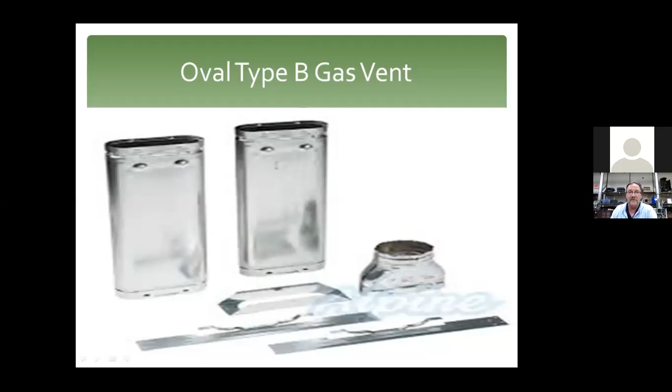Manufacturer's instructions are on the B-vent itself, everything's printed right on it. But once you get up through the wall and into the attic, you can actually go back to round and out into the flashing, because they don't make an oval flashing.

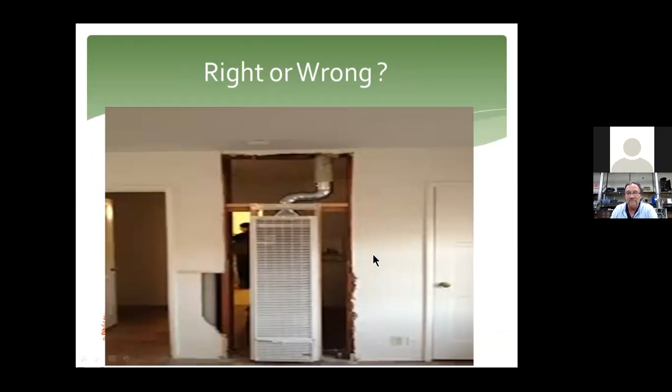This is some of the stuff we come up with out there. They tried to take the mobile home furnace and install it—well, actually this is the wall furnace. They took a piece and converted it back to round.

So, you know, this is some of the stuff that's wrong out there. Here's some other stuff we're always looking at. I need to move this thing, it keeps popping up. Hang on a second. All right.

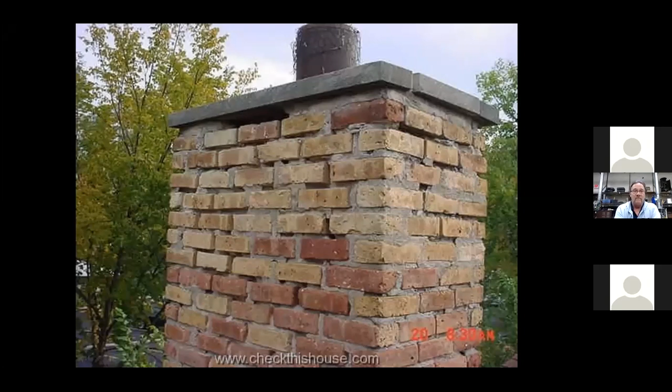Now, again, with the mortar missing, this is not because of the weather on the outside of the house—this is the weather that's on the inside. And the main reason is they put a cap on it, and put a piece of single wall pipe up here. This pipe does not line the chimney all the way down, it just stops right there. So all the flue gases inside are trying to go up that little pipe, and they're condensing. Flue gas, when it condenses back to moisture, is a little bit acidic, so it's eating the mortar joints away. That's exactly why your chimneys are falling.

This is a common thing right around here in Athens, and actually anywhere you go. I could drive down to Cole's hometown, Marietta, start walking down the street and find probably 20 different things wrong right off the bat.

Plugged flue. This is one of the reasons we require people to take draft tests, to make sure there's no spillage. A lot of the inspectors out there, when they do their initial inspection, they're not going to pull that vent connector off to check that. That's why we want you to take a draft test. If you have any inclinations, have the contractor or heating technician pull it off there and check it.

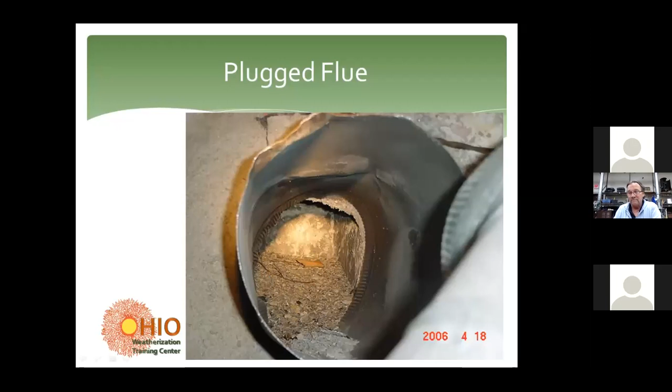90%. This is the mortar and stuff that was coming out of here, now laying down here. Again, this is a tile line chimney, but the unit attached to this chimney, this tile liner was not sized for whatever's attached to it, or there would not be any moisture. So basically, by the time the flue gases try to get to the top, they're condensing back into moisture and running right back down.

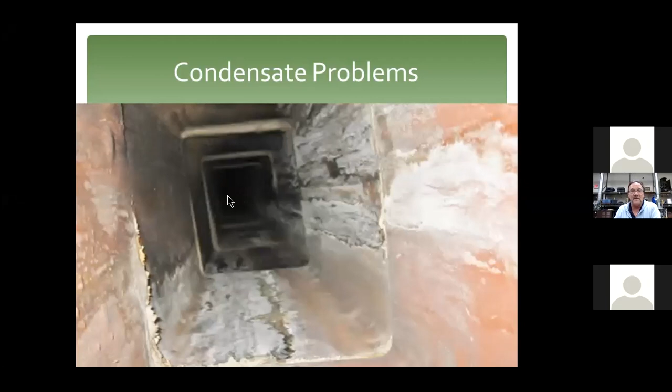Then you got critter problems. If Dave was here, he'd be getting his gun out right now. Get the live trap out, I mean. This is bad when you start having things looking back at you.

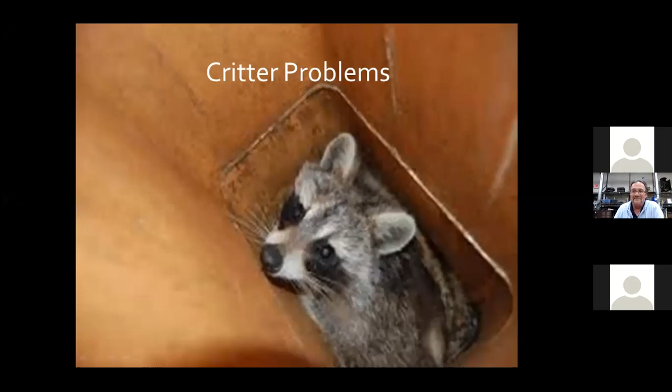Now, explain to me what I got here. Got a furnace connector, vent connector. Dryer vented into a chimney. I got a dryer vented in. Well, at least it's the lower BTU. Half right. And you know what? Billy Bob's got a good idea. You see what this thing says? Drain. He found out there was a problem with moisture in the chimney, so why not put something in there and drain it away?

Got a question here from her. She wants to know if you could explain the difference between a factory line chimney and a regular chimney. Yeah, we got that coming up. I got some examples of liners for the oil and the... Yeah, it's coming up. Good question though.

Now, unfortunately, after 40 years of this, you'd think you'd never run into anything new. Yeah, believe me, if you ain't learning something every day, something's wrong. So yeah, what Irv was asking, we're going to have to remove this, line that chimney, and we'll show you what you can do with that down the road here.

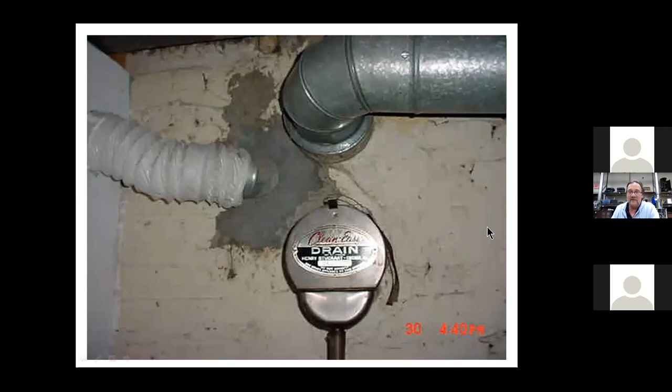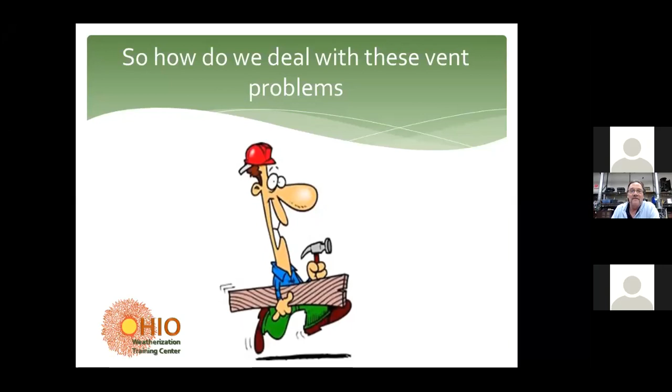So how do we deal with these problems? Jim Bob to the rescue. Actually got a picture of Jim Bob now.

The liner that had the raccoon in it and the moisture spots, that was what they call a tile liner, and you would actually install that while they were putting the chimney up. Now, technically, a tile line chimney, if you can prove it's in real good shape, no cracks, and it's sized properly, is considered a lined chimney. But in most cases, we can't inspect the entire chimney, so we just assume it's not in good shape. And if it doesn't have a liner in it, it's required to be lined, and this is what you would be using.

This is a liner, a flexible liner kit. These come in a couple of different sizes, 25 and 30. If you need more than 30, they sell a kit that comes in 10-foot sections at a time. It comes with a cap, and depending on the manufacturer, it may be a little different than this one. It comes with a top plate, which is almost never big enough.

Anytime you line a chimney with a liner, you have to cap the top of the chimney off. A lot of people don't realize once you cap that chimney off, it no longer becomes a chimney, it's called a chase. You also have a mortar sleeve. This will go down at the bottom of the chimney where you're bringing the liner out, to keep the mortar off the actual liner itself.

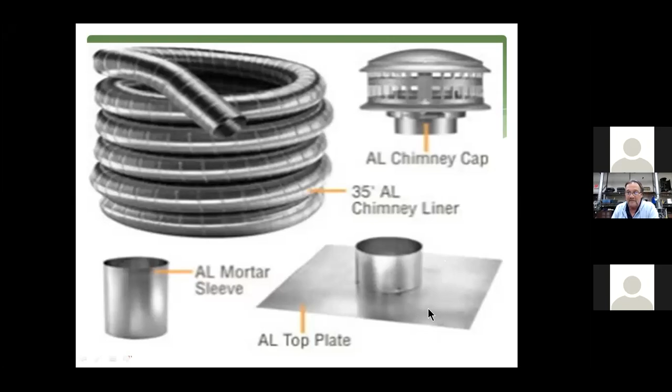Most generally, when you put these in, you're going to have to just throw this thing away and get a bigger sheet of metal. They usually almost... I don't think I've, out of maybe 200 or 300 that I've done, more than 10 where I was actually able to use that for the right size.

And a lot of times people don't realize, if you have... and this is a sizing chart for flex vent.

There's a couple of 3 or 4 different manufacturers out there of flexible vents - there's Z-Flex, Flex Vent, and a couple others. But anyway, they have their own sizing chart. It's got everything already derated to 20%. You can see on the table there, not very good, but you can see right there, it's already derated.

All you got to do is come up with your numbers and single wall or double wall connector, and it tells you exactly what you need. Or you go to the NFPA 54 and you got to do a lot more calculating.

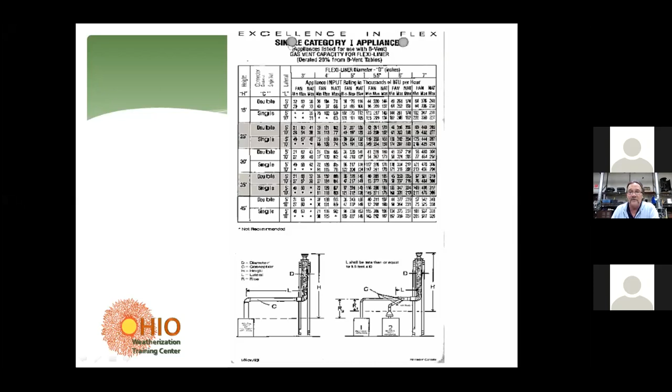So down the road we'll go over all that stuff. Again, this is just to give you an idea. This is some of the stuff that you need to be concerned with, need to be looking at, and understand some of the parts and pieces before you start getting into the how to, why to, and how to get it done. So that's the back side of it there for single appliance. The other side was for double or 2 appliances.

So again, I always went with manufacturer's instructions, and in this case, it was a lot simpler than going to the NFPA 54.

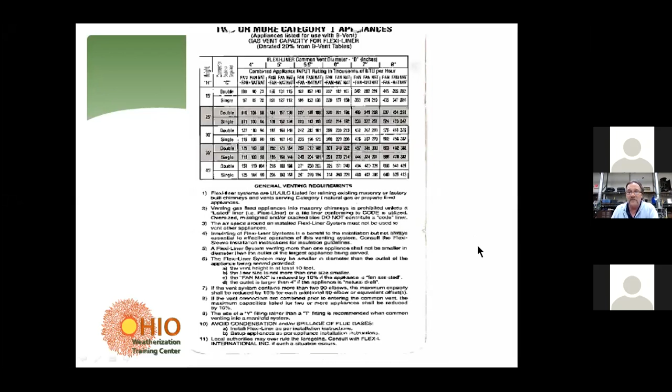Now, the one thing - this is a copy of the actual flexi liner that we use down around here. Now, this is the bottom of where the liner comes out. This is a mortar sleeve right here. This is part of my flexible liner.

If that chimney is lined all the way to the top, should there be any mortar inside the chimney or liner? No. And this again is where we always tell the initial inspectors, if it's already got a liner in it, or it looks like it may have a liner in it, have the technician and or contractor remove the connector and look inside to check to see if this is a problem. If this is a problem, that means somewhere all the way up that chimney there's a break.

And most generally, people I talked to that automatically told me they hated chimney liners is because they didn't install them properly. You stretch them too much, they break. You pull them too hard, yank on them too hard, going up some of these chimneys, they get snags in them, and sooner or later they're going to fail. I've probably got, I'm going to say, a couple of hundred chimney liners that I put in my lifetime, and not a one of them failed. I even had to get the old grandma in a wheelchair to help me put one in one time.

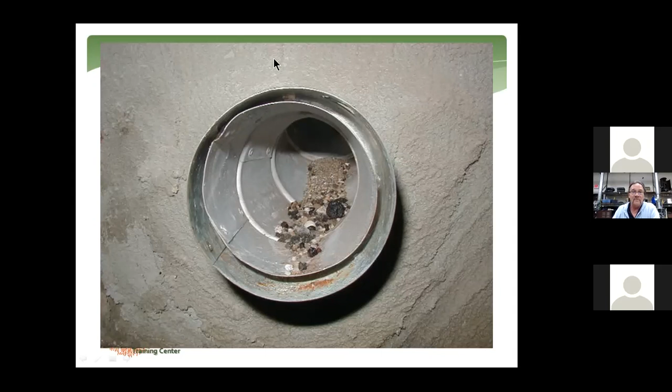Jim, can I interject for a moment - I just wanted to point out too, on every level, inspector, technician, I've seen dozens of times where they've had a chimney liner just jammed into the chimney in the basement, and they either fooled a building inspector, a service tech, somebody, but then it's been assumed that that chimney was lined. So you have to be very careful and confirm that they did truly install a liner. I've seen that a few times.

Yeah, well, that comes right into play, Ryan, with this piece right here. If they try to do something like that, that moisture that's not getting out of the chimney like it's supposed to, it's going to eat that liner up. And if you pull it up through and break it, that's the start of this liner getting chewed up. And this is an example of one that I've removed. It's bad because it was installed badly. So yeah, that's what I say.

If there's a liner there, don't just assume that it's going all the way to the top, because there's maybe missing about 20 feet in between. I always, even in my business, if there was a liner existing, I would pull the connector off and take a look. And if I had to, I'd head to the roof and pull the cap off. And 99 times out of 10, there was a liner there, but every once in a while you found this kind of stuff. So yeah, that's the contractor that goes out there and he buys a 30-foot, because I'm going to get the 30-foot because I can get 5-foot pieces out of that.

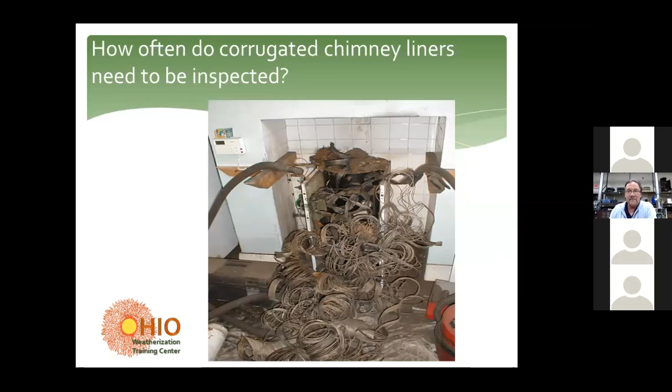Well, get the right tool. Remember me, I'm the guy that buys the right tools - no, I didn't buy that tool. Remove the connector, the vent connector at the bottom, get your flashlight and mirror out, look up as much as you can. The only other way to look at it is somebody's got to go on the roof. I know people going on roofs nowadays is getting a little hairy, but if you want to do your job right, sometimes you just got to do it, I guess.

I wonder if that'd make a good fishing truck. Could lever me out over the... I don't think it'll float very good.

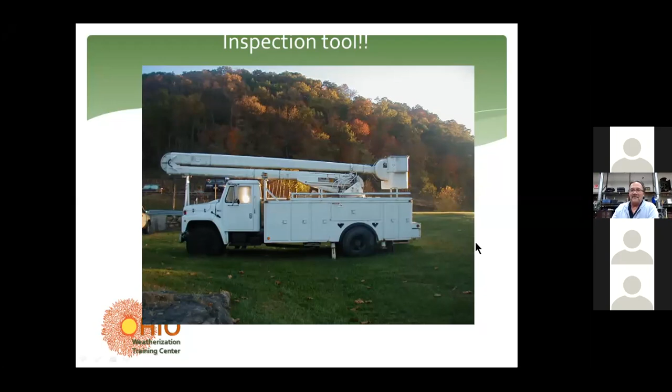All right, Type B vent. That's the double wall pipe that we're most familiar with. Where and when to install, how to install, how to size, and briefly how to size.

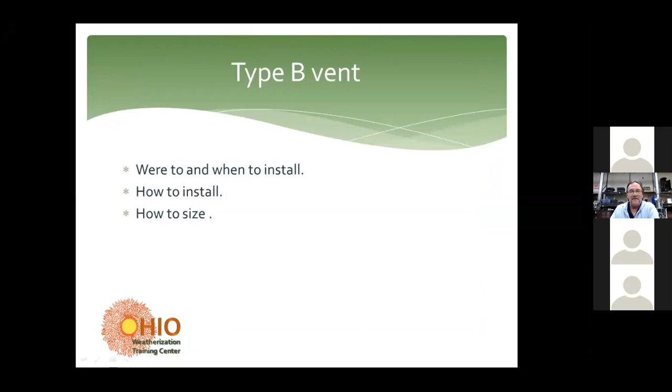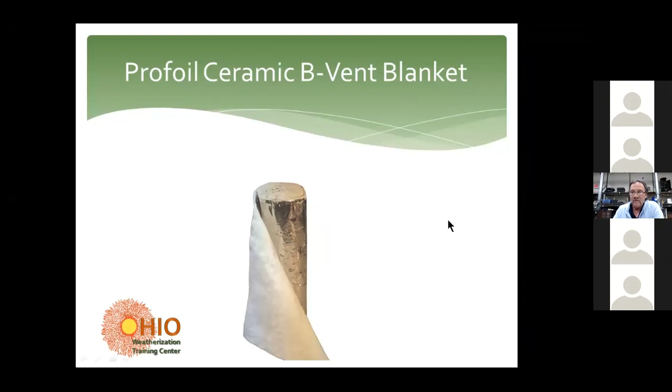Here's some of the ceramic B vent blanket. Technically, you could just wrap fiberglass around it, but they also have a blanket you can order. That's one of the things the quality control inspector needs to really look at, because a lot of times they'll box them in and not insulate it.

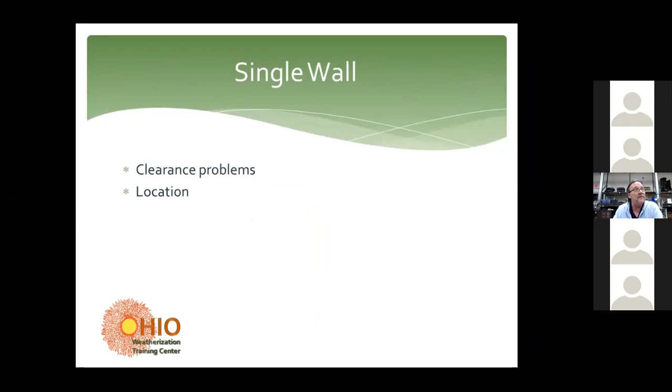Single wall, some clearance problems, locations. On this particular one, I'm kind of concerned that they don't have a 6-inch minimum clearance on the single wall to the combustible, but my real concern is the plumber. I think the plumber is going to burn it down before the vent connector does.

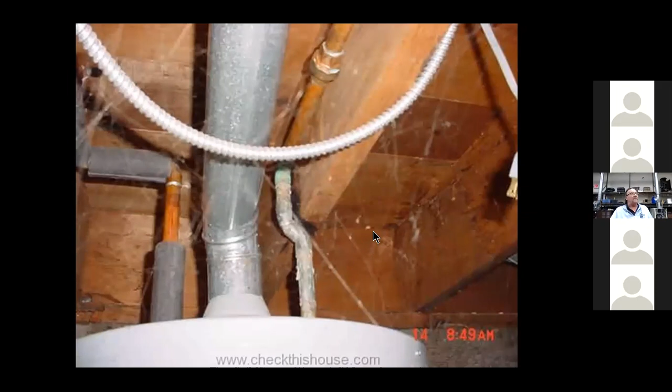Now this is right up the road. I don't know what they were thinking, putting the vent out here and hanging a light on it so I can see the vent. Not going to work.

Wonder if that's fire rated Romex. Did they make that?

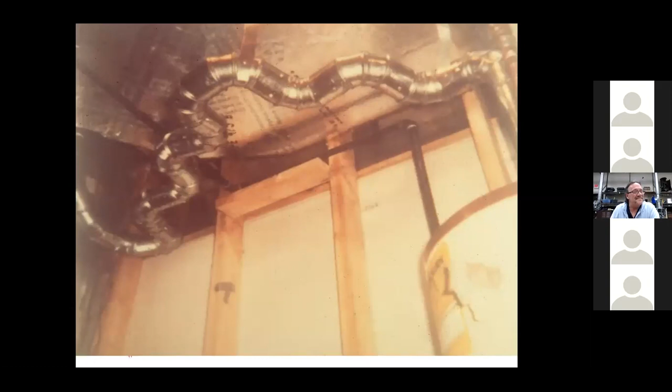How do you fix a draft problem? Add more elbows. The draft was real high on this one. The only thing they could come up with was they knew that if you add more elbows, it adds more resistance. So, let's put some more elbows in there and see what happens.

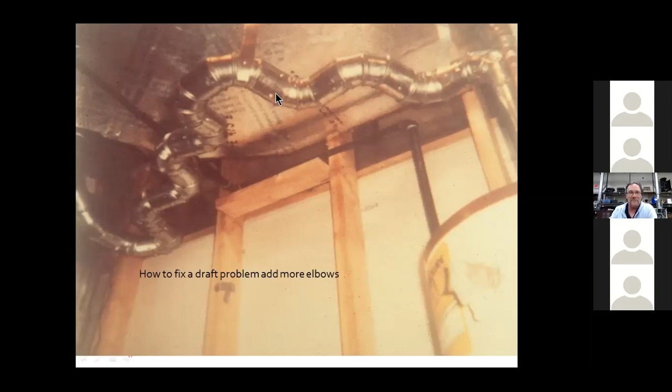We ain't there. We ain't lacking work out there, guys. We just ain't lacking it. We got all kinds of things going on here.

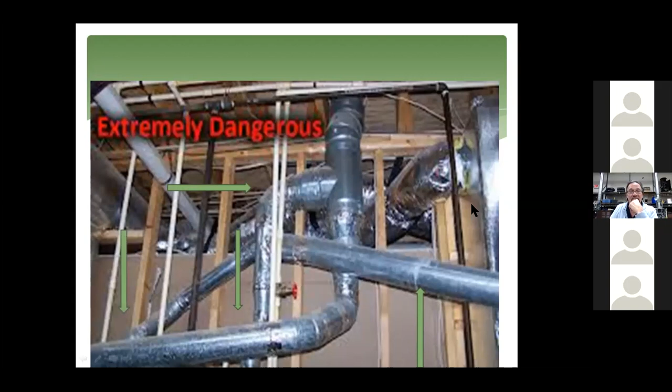And what do you do with the sewer pipe? You use it as a hanger. And we still can't get it straight. We start off here, up, down. And if I could have blown the picture up a little bit more, you could see where this was all melting right there.

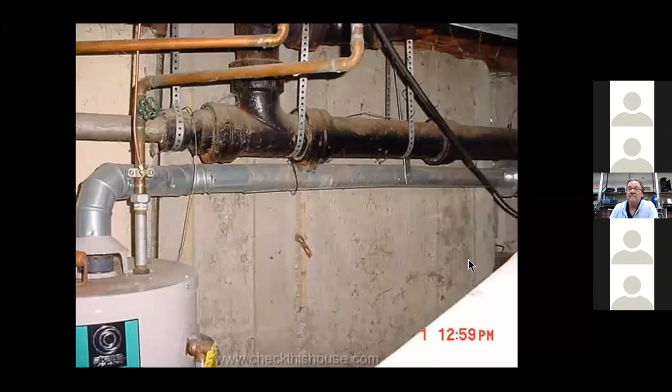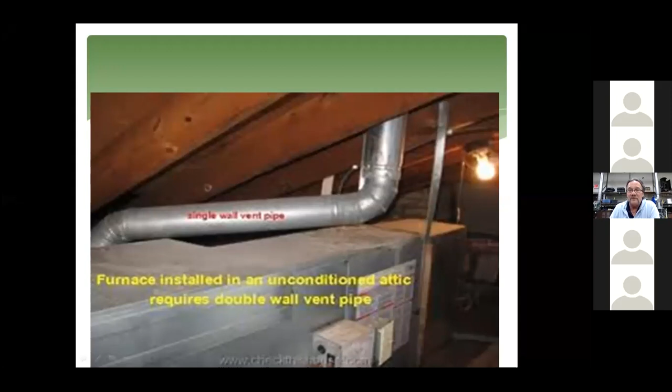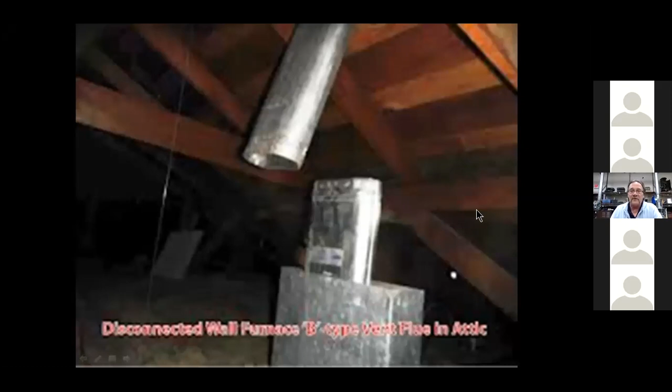Here's some of that oval vent, and this is with the wall furnaces. I forgot to put that up with the wall furnace earlier, but this happens with these wall furnaces all the time. People have a hard time putting the oval vent together, making sure that it's okay.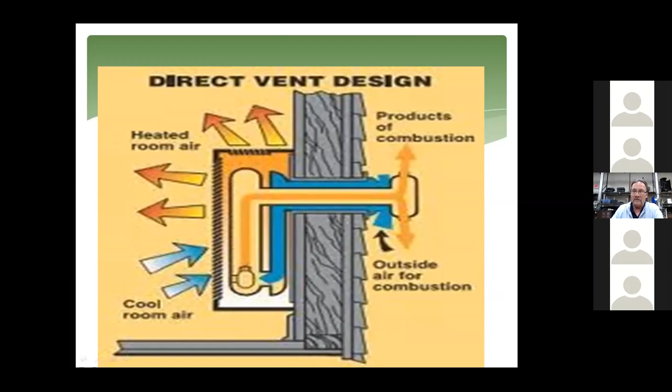Now we can look at the 90 plus furnace. This is called a direct vent 90 plus furnace because 100% of the flue gases are going out and 100% of the combustion air is being brought back into it.

Whenever HWAP installs a new 90 plus furnace, they're required to put in 2 pipes. That requires it to be a direct vent. Now, in some cases, when we go out and find a 90 plus that was installed by a contractor who wanted to do it a little cheaper, it would only have 1 pipe on it, and the combustion air would be coming in from the basement. That would be a non-direct vent 90 plus, because it only has 1 pipe on it.

If you choose to, you can add that extra pipe if you find it that way, and I would highly recommend it. We always tell people when we're doing our training, anytime you can add that extra pipe, put it in there. That way we get rid of a hassle down the road, and we don't have to worry about not having enough combustion air.

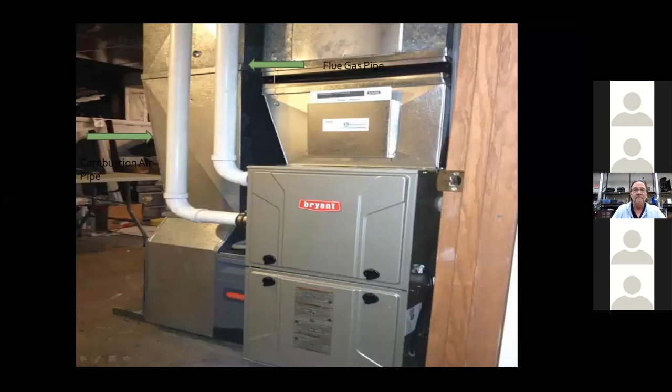Direct vent 90 or water heater. There's quite a few different types of them out there. This is an actual 90 plus one. It has a motor, with exhaust going out and fresh air coming back in. Rather expensive tank.

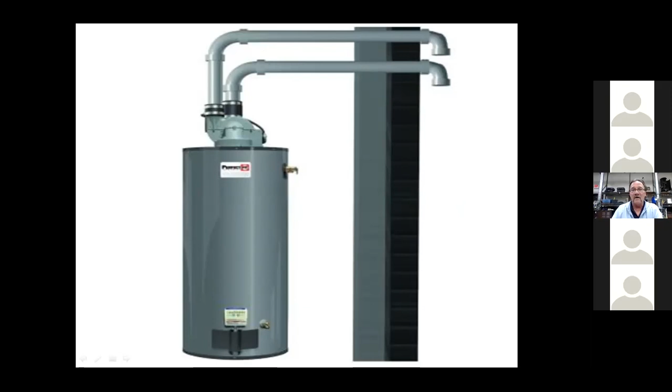This is one that I've been... I put them in, helped put them in back in the 90s for the Warm Choice program. But at that time, this vent connector, which is a concentric flue, was only about 20 inches long. You didn't have a whole lot of choices of where to put them. Nowadays, you can buy these direct vent water heaters, which have no working motors or anything like that on them. And you can get this connector up to, what is it, 12 feet now, I think, Jamie? Yeah, in some cases the manufacturer allows 8 feet, and sometimes it's up to 12 feet.

A much better option for, I'll say, the low income. We don't have to worry about that motor going bad like with the power vent. And again, it's 100% direct vent. We've got air intake here from the outside and exhaust going out through the middle here.

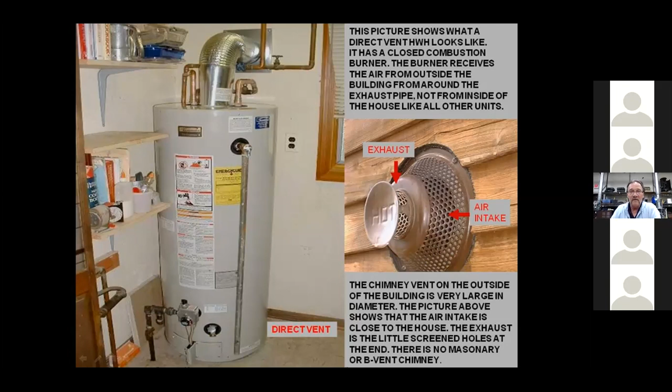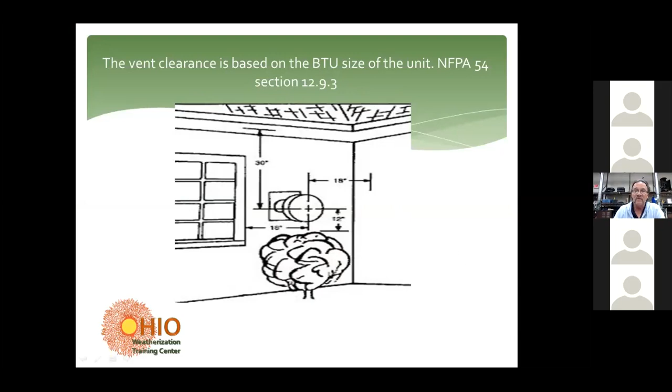When you start dealing with direct vent appliances, you've got to have vent clearance. It's based on the BTU size of the unit, per NFPA 54. The section may not be right, I didn't get a chance to look that up. This was a previous version, so that section number probably isn't right. And again, there's a lack of proper work out there from Billy Bob, Uncle Joe's, and all them doing this kind of work.

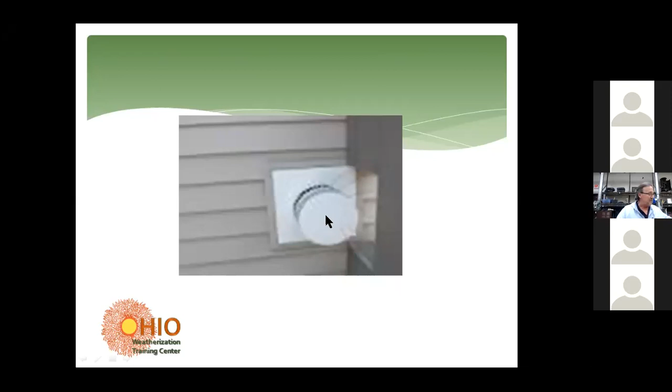Too close to the wall, we end up burning something down there. People wonder why houses burn down.

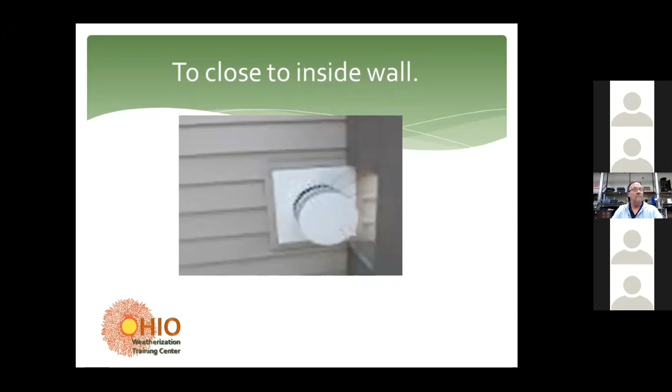This is a picture of a concentric flue that you could use for the 90 plus instead of having 2 pipes running all the way out. The combustion air comes from the outside, goes in here, runs back through the furnace here, and this would be my flue gas. It runs straight through here and comes out the end.

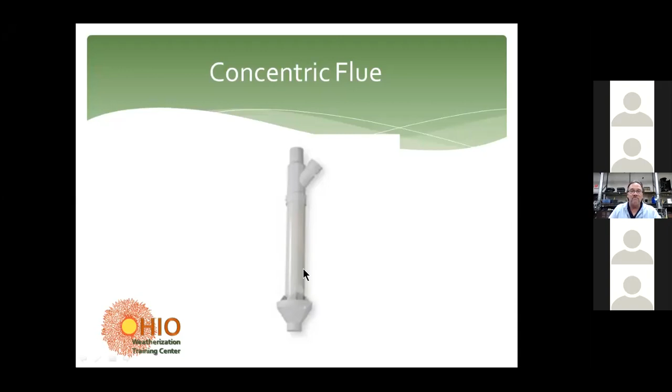When they finally came out with that - I've worked on a lot of old homes, and you guys do too, with stone, brick, concrete foundations. It's better to knock one 4-inch hole than it is to have to do 2-inch or 3-inch holes. And these vent a lot better going up through the roof.

I really like the guy, he really did a good job. He sealed it all up, got a nice little distance there so the air for combustion can come in.

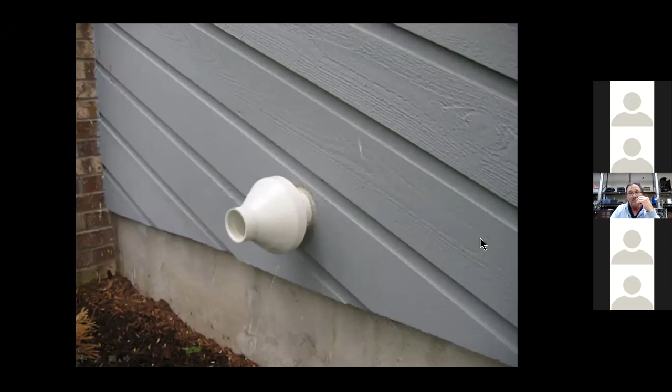He checked the above grade clearance. Does anybody know what that clearance is? I'm eating a piece of candy, so I'm having a hard time talking right now. So, 12 inches - 12 inches above anticipated snow. I'll take both of them. Good job. Let me quit eating candy. If I keep eating candy, you guys are gonna have to answer a lot more questions.

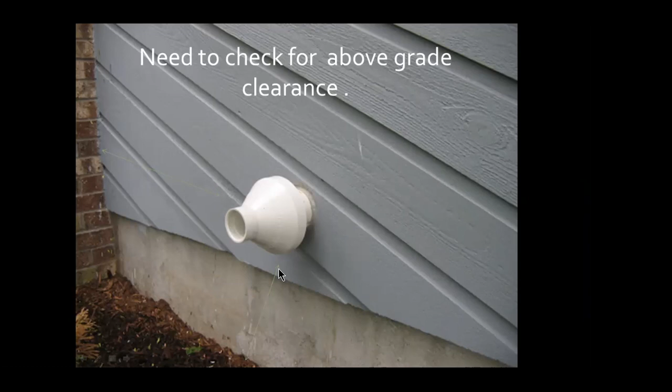NFPA, and again, when we're dealing with code issues out there, everything's minimum clearance. The manufacturer may say more - if they do, you want to go with PMI, which is per manufacturer's instructions, or you want to go with local code. We always pick on Ashtabula - sorry, but up around Ashtabula, or anywhere above I-70, I'm going to take the anticipated snow level.

And this is kind of weird, because you guys know how a mobile home furnace vents on the top of the mobile home. We've had a couple of times where the snow was high enough that it smothered out people's furnaces, because we don't anticipate 2 or 3 feet of snow all the time around here.

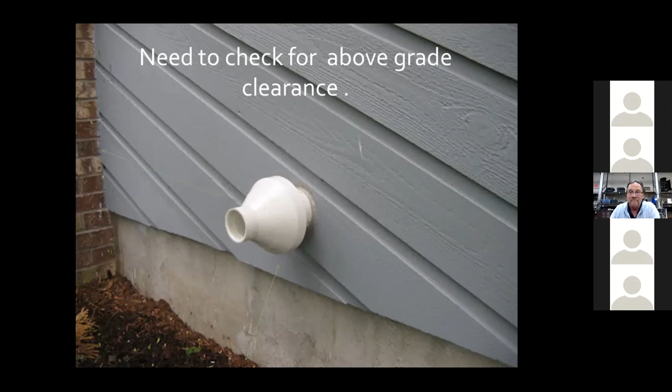I thought this would be kind of... I don't know. We have venting issues, but we've got a whole lot more going on there than just venting issues. Okay, this would be a 90+ single pipe, non-direct vent appliance, vented into a masonry unlined chimney.

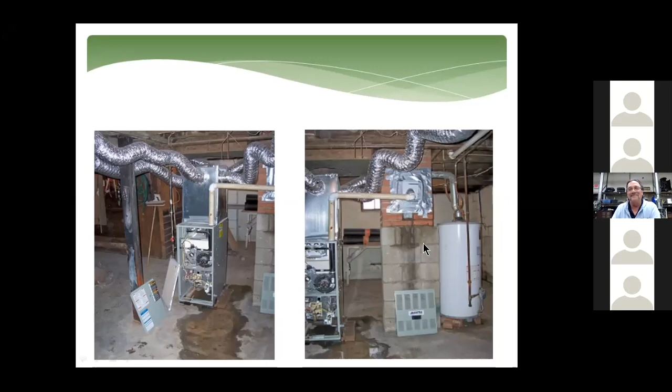Again, not a very good picture, but this is a pellet stove that was installed by somebody that didn't know what they were doing, probably a typical homeowner. They didn't realize the black was soot, which indicates carbon monoxide. You can notice even the windows are open. Yeah, it's a wonder more people aren't dead out there.

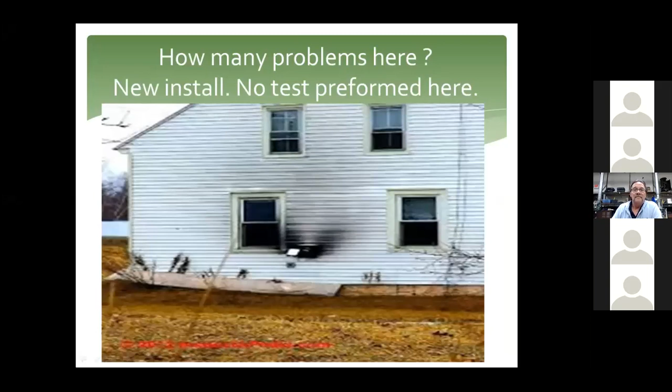Again, this is the great city of Athens. All I got to do is go uptown, park. Hopefully I don't get a parking ticket, and just start walking around.

Nice job strapping it in. He even put a little bit of foam pipe wrap on it to keep it from vibrating. Didn't want to hear that noise.

This is the exhaust. You can see where the flue gases have been rusting, interacting with the copper pipe and brick. This is my intake. This is a dryer vent, which would be sucked right up into the intake, back down to the furnace.

This is an exhaust pipe to another one. I have no idea where the intake pipe for that one is. I think they ran out of pipe, so they just went ahead and that's it. They just run out of pipe. So hey, you got enough pipe, don't worry about it.

And this is something that happens a lot and people don't realize it. They get things too close together. I've seen these freeze up and start freezing back the pipe. That will shut down the furnace.

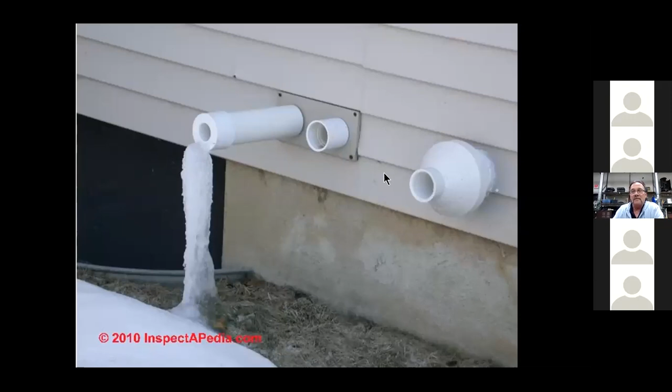Now the problem with this here is this could actually recirculate. Flue gases come out of here, and that's mainly what's going on here is, and people don't realize, is the flue gases coming out of this particular unit on this concentric vent is being sucked right back into the combustion air, and it's already coming out condensing at 100 and some degrees.

Got a question from Mike Lehman here. He is wanting to know what clearance from the intake valve there on the concentric vent of the house. There you need to be about 3 inches there, and again, that's where the instructions come in. Used to be one manufacturer that made this concentric vent, and now there's 5 or 6. We got one, I don't know where it's at, but yeah, you don't want it right up against the house, or we're not going to be able to get no air to come in there. That's a really good question, Mike.

The ones that I used was 2.5 inches. Now, I don't know, find out whatever you got in your area. Look it up. Google it. Google will give you an answer.

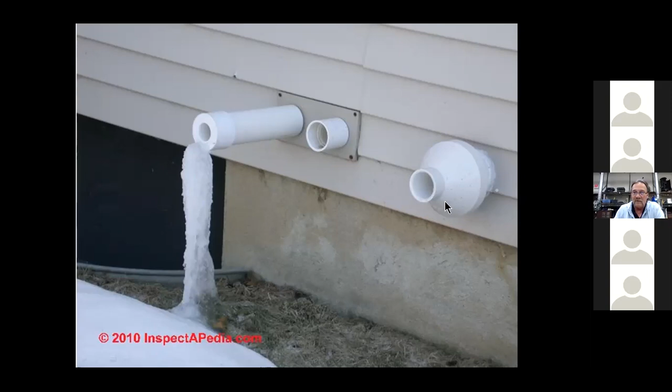So this is the problem here. They're just too close, okay, so we're recirculating it, and this is hard on it, and that's going to freeze up and shut this furnace down. It's probably a good thing they got 2 furnaces in the house.

Here's another problem. Actually, this might have been another one of them. I don't know if Kevin's still on here, but he gets me in trouble every time I go out taking pictures with him. We do a drive-by, take a picture, and we get a shotgun just pointed at us. Sometimes, in some areas of Athens County.

Anyway, this is, I knew the contractor to put this in because I actually bid on this job. I didn't get it, but guess who went back to work on it? It's 90 plus. He put a Janitrol in it. It required 3-inch venting. He brought it. I think that was about 4 foot up, and this one was about 3 foot up.

And the problem with that, it's not much of a problem with the intake. The problem is the flue gases that's coming out of this pipe are already, without being exposed to the outside air, at around 110, 120 degrees. And you start pushing 120 degrees into a 3-inch pipe that's sticking 4 feet in the air at 30 degrees, it's going to start freezing up.

And the complaint I got after they found out that they couldn't get a hold of the guy that actually put it on was my furnace keeps shutting down. Well, when I went out, I knew exactly what it was. I went up, whacked them off, and put them at the right height, or put them as per manufacturer's instructions.

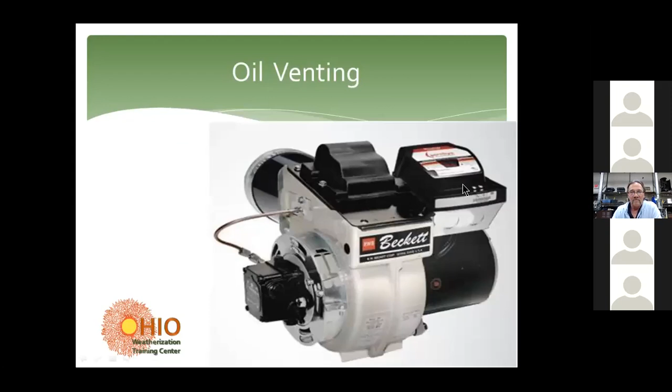Oil venting—well, good luck. Let me go back. For oil venting, you're going to have what they call L vent, and I wasn't able to find a picture right away. Actually I got the picture but didn't have time to put it in here. It's galvanized on the outside, kind of like B vent, but instead of aluminum on the inside, L vent is stainless steel. If you have to revent an oil furnace with L vent, you need to check those parts out ahead of time because they're not usually readily available. Jamie will show you a piece of that if you can see it.

Oh, no—yeah, we'll see.

See pretty good. All right, so if you have to vent with the L vent chimney, you'll need to go to the supply house and order it ahead of time, because normally supply houses don't carry that particular size, 5-6 inch for oil. Now you can get it for your pellet stoves—they use L vent for that, 3 and 4 inch. There aren't too many oil furnaces out there that you're going to be venting with 4 inch.

I have some examples down the road here, but I'll mention it. Most oil furnaces I've come across have been vented into a chimney, a masonry chimney. I would just end up lining that with a stainless steel chimney liner—same as the gas liner, except actually made out of stainless steel. Rather expensive; you can pick one up for a typical size for about $600. But it's sometimes a lot easier and cheaper than the L vent.

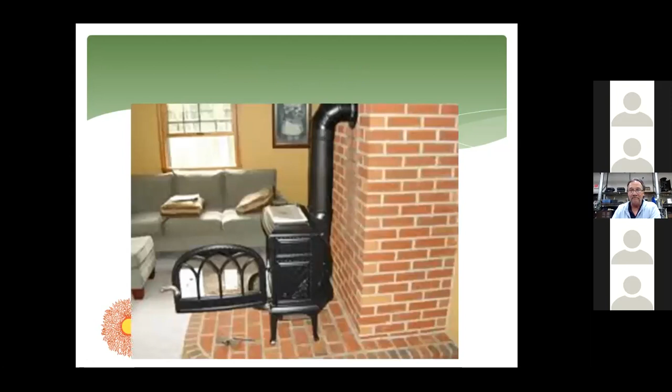Wood stoves—we don't work on wood stoves a lot, but I'll give you a couple of ideas of what you should be looking for if we're going to be leaving them there. You've got the fancy ones, with the nice little brick hearth there, and no clearance problems on the chimney.

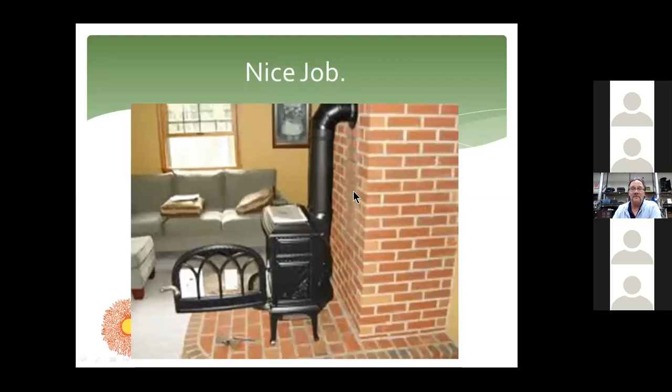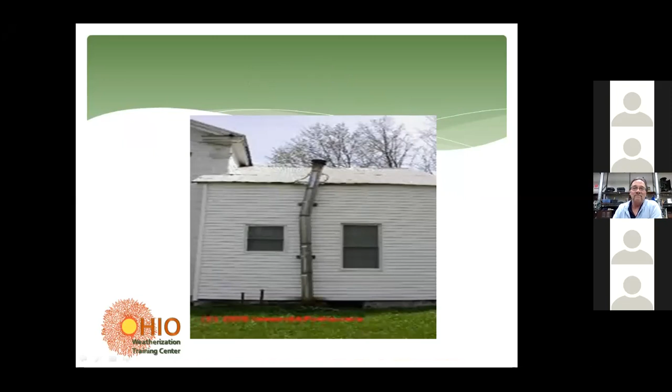I don't know what happened here. It looked like it was designed that way. Maybe they just needed a little bit of a right hook. I don't know. This is one, and Kevin might recognize that one too—it's right next to the Trimble Kroger's. Not anymore, I think they sold the house and sold the wood stove and the vent pipe.

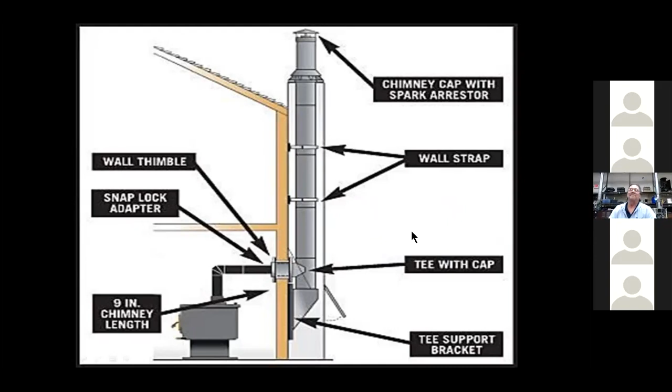Sir, could you come over here? Yes, sir, master. Yes, sir. Yes, sir.

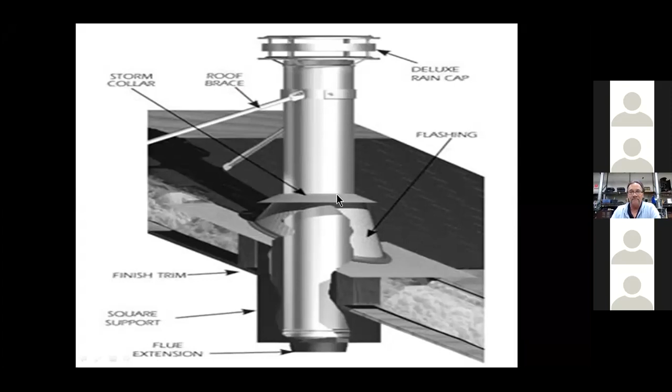Again, if you're going up through the roof, they got a support bracket that goes in there. This is the actual flashing, and that little ring that goes around the top of that flashing is called a storm collar. It's on any type of venting that you use if you come up through the roof. That storm collar is there to direct the rain away from your flashing itself.

All right, so this is if we're inside and we're coming straight off of the wood stove. They make what they call a ceiling support package. So, you know, all in all, do some research and make sure that you buy the correct stuff.

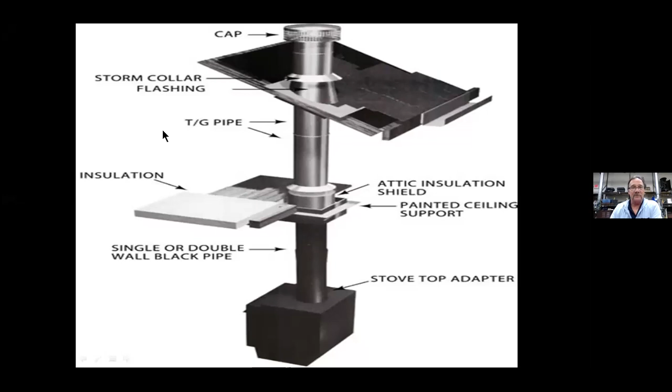The 24 gauge steel single wall pipe, we refer to it as black pipe. What we usually run into is the blue pipe, which is 30 gauge if that—blue pipe that you can just mash in your hand. This 24 gauge steel pipe, you ain't crushing it. It's designed to be there for a lot longer time because it can handle the temperature. The blue pipe they go buy at the local hardware store is a cheap version, they're able to go buy it once a year because it don't last more than a year.

Now, one thing, let me see, just real quick—nope, let me go back. With wood stoves, if you've ever put a single wall pipe starting off, you'll notice that the back of the stove or the flue connector, whether it's on the back or the top of the stove, is designed so that the crimped end of the pipe fits into your stove, not the other end. It's that way because when we burn solid fuels like that, we have what we call creosote that is formed. Creosote is like a liquid.

It will run back down into the stove and burn. If you turn the pipe and have the crimped end going up towards the ceiling, it will leak and run down the side of the pipe and catch on fire.

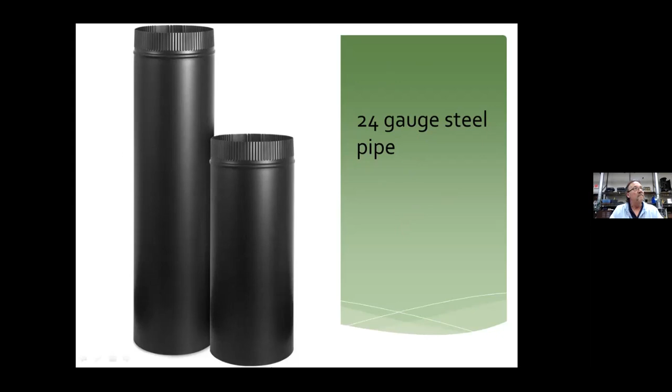All right, so the stainless steel triple wall pipe is what you're going to need to use once you exit the pipe, or your single wall pipe, going through the ceiling, through the wall on the outside. It's stainless steel on the outside, stainless steel on the inside, and some of it actually has insulation stuffed inside. There's a couple, 2 or 3 different versions of it out there. The clearances, it's MII — whatever the manufacturer that makes it. Pay attention to what they want. Don't listen to anybody else. Just pay attention to the MII.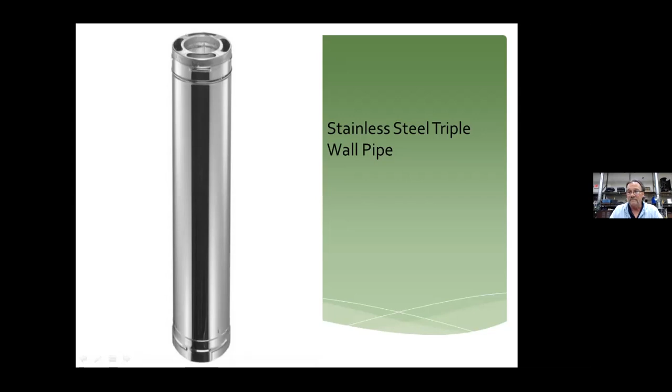I'm pretty rough here this morning.

All right, just a quick one — like I say, one of the purposes of some of this stuff is we want to get you interested. We want to let you know what we're doing, and down the road we can come up with some stuff to actually start showing you how to size this. But this is a quick version of it. First, you need to know what category appliance it is. I'm running out of breath there.

Okay, you got 4 different categories. I ain't gonna go into them right now. When we do our thing, we'll put it up on the board and talk about the 90 plus, the 80 plus, and what categories they are. Another thing, you need to be familiar with the data plate. We need to know how many BTUs the unit is.

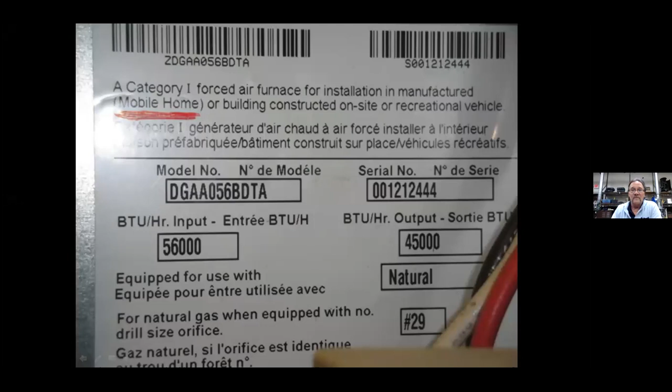And then there's a quick chart in there for connector diameter — maximum in inches, how long it can be in feet. And again, we're just going to touch on a couple little things here. See, a 4-inch should be no more than 6 feet.

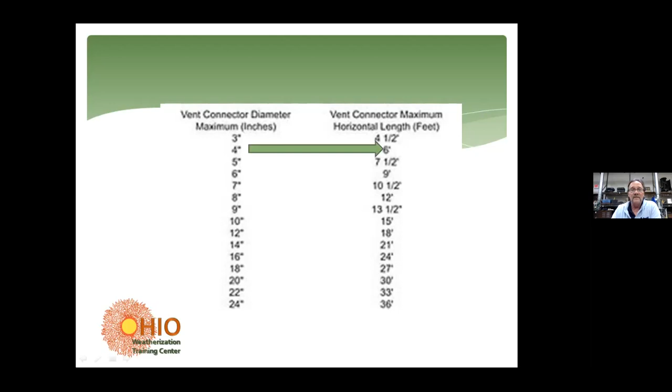Why is this? Come here, James. Give me a second here. I got it — when I move this thing, man. Yeah, that's their bar there. I gotta keep it from moving because it covers up my stuff. They can't see it. Well, I mean, yeah, it's covering some of my stuff. Okay, they can't see it. All right, never mind, you ain't seeing it.

Just a real quick one — this is a handout we hand out, but all this information is in the book. It's telling you, when I'm using these vent sizing charts, the elbows — you're allowed 2 90-degree elbows per heating unit. After that, it will require a 10% reduction. So basically, whenever I'm using these vent charts, they're assuming there's going to be probably 2 90s in that vent somewhere. Okay, and they're pretty much right. But if you go over that, they're giving you some reductions after you go over it.

And again, it's like with the corrugated chimney liner — I showed you the one that I had. I actually got a venting chart from the manufacturer. Now, if I didn't have that venting chart, I would actually have to go with the corrugated chimney liners section in the NFPA 54, and it says you must allow a 20% reduction for a chimney liner whenever it is used in the masonry chimney. You do not count the 90-degree if it is made using the chimney liner at the bottom of the run, the corrugated metallic chimney liner. So basically, I've got to do a little bit of math calculation to make this work, or I could actually use their chart. I like using their chart, but we'll show you how to do it that way. If you don't have the chart, you'll be able to do it.

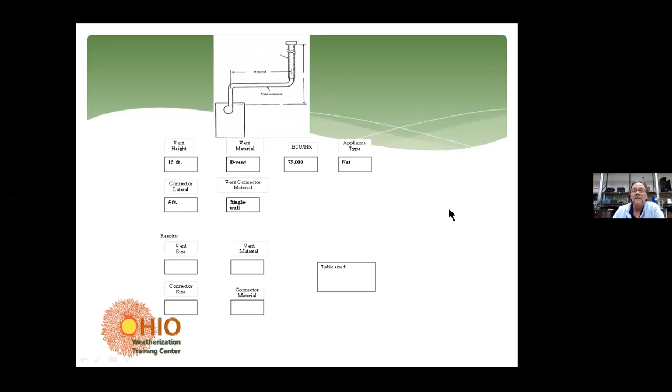When we go to the chart, on this one it doesn't say it, but it says on top: single appliance, single wall connector, B vent. Where most people make their mistakes is they forget to read the top of the chart. Again, this is just a quick overview of what we're going to be running, getting into down the road.

So we said, what was that, a 15-foot height? And what was it, this is the height of my, right here, a 5-foot lateral? Yep, the 5-foot lateral is the length of my connector. And it was a natural draft appliance, right? So I got nat max, and then if it was fan assisted or an 80 plus, it would be a minimum or maximum on the fan. So we come over and we had, what, 75,000 BTUs.

Okay, so it says in the 3-inch, under that it won't handle but 45, so it's not going to be big enough. So we go over to the 4-inch, it says it will handle 87,000 BTUs. Our unit was only 75,000, so that means I can vent that particular unit, starting from the connector all the way up through the roof, with a 4-inch B vent pipe. That would be a 4-inch single wall connector connected into a 4-inch B vent. It is kind of that basic, but you still have to understand some of the rules that go along with doing this.

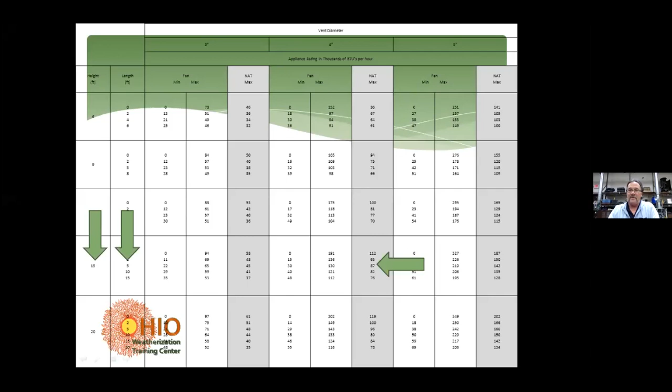So let's just quickly go ahead and give you an example of 2 appliances. Again, we need to have the vent height for this particular one here. The vent height is 15 feet, and that'll be for both appliances. I have a 40,000 BTU natural draft hood appliance, and I got a 70,000 BTU draft hood appliance. The vent connectors are single wall. The common vent, which is the vent here, is B vent.

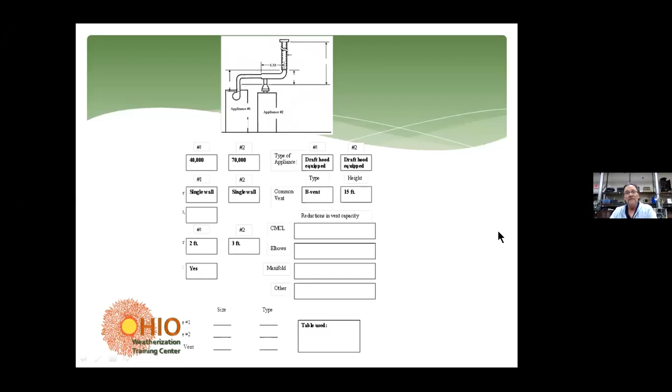Instead of doing the lateral, when we're doing 2 or more at a time, we need to know the connector height. So one's 2, one's 3. This is considered a manifold. So what we're going to do now is use the top chart in our book for the connectors, and then the bottom chart for where both of them go into the common vent.

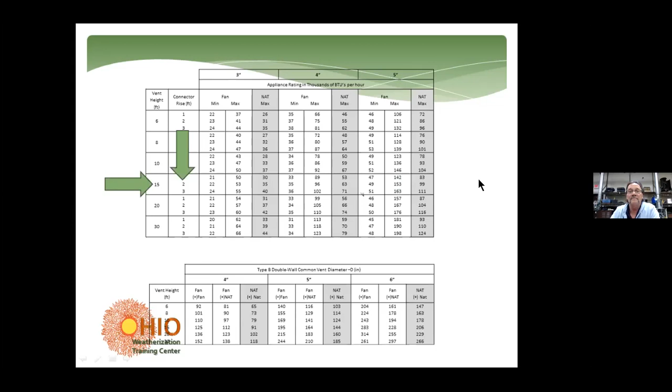So we had 15 on the one, we had a 2-foot connector rise, and it was, what size was that? 40,000. Okay, and then our second one, so it looks like both of them is going to be 4-inch. So now that's the connectors only. Coming off of both appliances, it will be a 4-inch connector, and then we go down to our common vent where both of them is going to be at 15-foot height, and we add them together, we're going to need a 5-inch pipe. So that means both connectors would be 4-inch, and then when we go into our B vent, we would be going into a 5-inch B vent.

And again, just a quick down and dirty. It's hard to do PowerPoints on the sizing charts because we're not allowed to do a whole lot with them. So what we'll do is we'll go ahead and take some stuff from the Dave and Cool show, and we may even have the Dave and Cool show do it. I'm not sure, but either the Dave and Cool or the Jim and Jamie show will do some vent sizing.

And have you guys done any combustion air stuff yet? Yeah. Okay, yeah, anyway, we'll get some stuff up there.